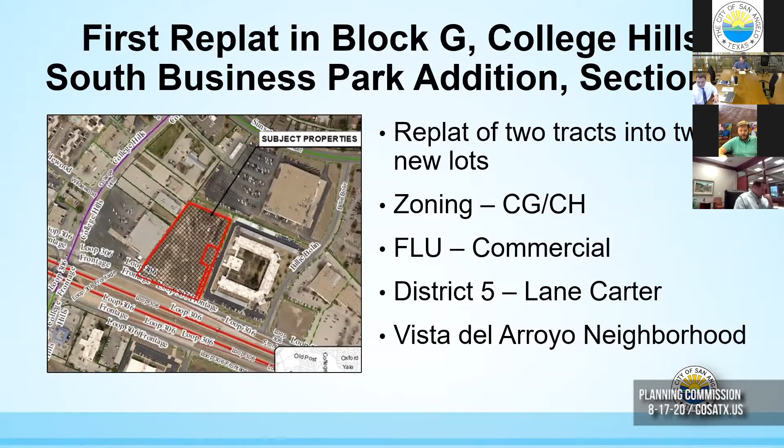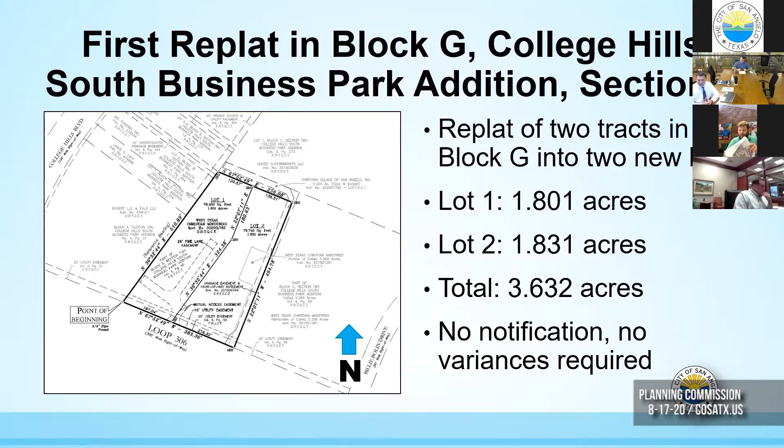So this will be replatted into 2 lots, future development for commercial. The zoning is CGCH. The future land use is commercial, and it's in District 5, Lane Carter, in the Vista Del Arroyo neighborhood. Lot 1 is going to be 1.801 acres and lot 2 will be 1.831 acres, total of 3.632 acres. This one's fairly straightforward. There's no notifications required. It's commercial, no variances required. It's just platting simply into 2 lots.

Staff believes that the plat conforms with the comprehensive plan. It's within a 1.5 mile commercial corridor on the north side of West Loop 306. There's an existing sidewalk that was built inside the property, and that will connect to a future TXDOT sidewalk, which should be built sometime in 2021 or after. So that sidewalk will need an easement. That'll be a condition of approval we'll get to in a minute.

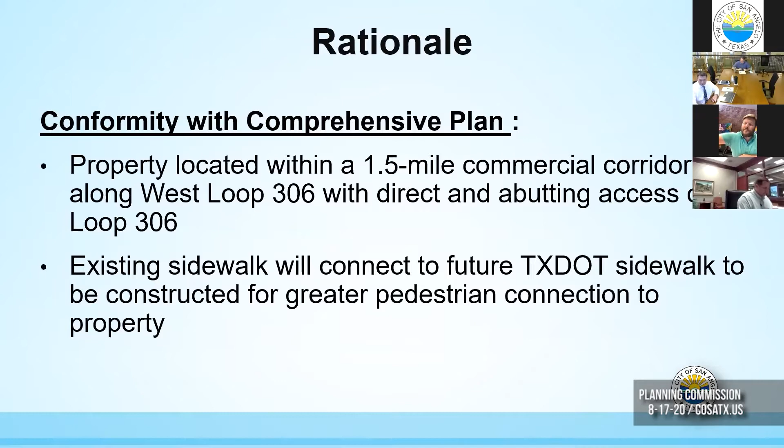Direct abutting access the lot has on Loop 306. There's the existing sidewalk, so that meets statement D in the Land Development and Subdivision Ordinance for safe vehicular and pedestrian circulation. There is a required water and sewer main that will be installed, so that'll satisfy statement G, and the efficient layout of lots will continue to have direct access on West Loop 306 with frontage. So that's just the logical order pattern of development, statement O.

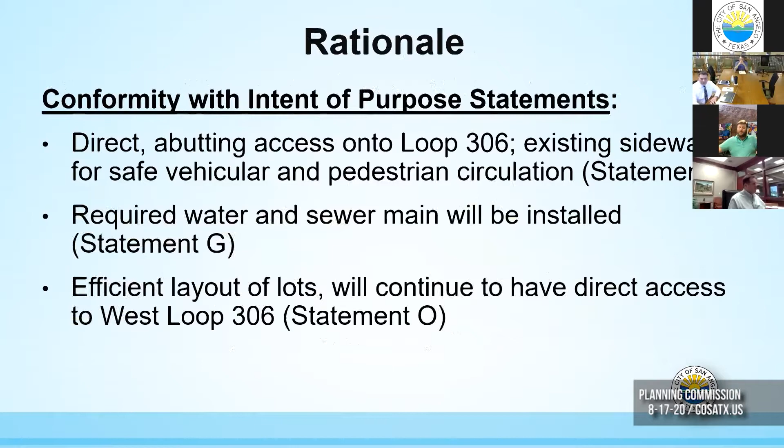Yeah. Staff, are you there? Oh, yes, go ahead. Yes, I'm sorry. You were cutting out on me.

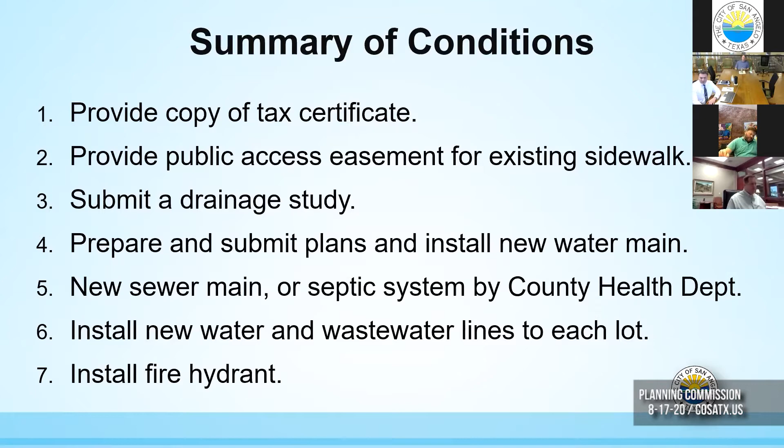Go ahead. Okay, so staff recommends approval of a first replat in Block G, College Hills South Business Park Addition, Section 2, subject to 7 conditions of approval: provide the tax certificate, provide a public access easement for that existing sidewalk, submit a drainage study, prepare and submit plans and install a new water main, a new sewer main or a septic system approved by the County Health Department (engineering can speak more on that if you need that), install a new water and wastewater lines to each lot, and install a fire hydrant.

So this concludes staff's presentation. Any questions or comments? Anyone have questions for the staff?

All right, I'm going to open it up for public comment. Jeff, please stop sharing your screen so we can see everybody. Pardon me.

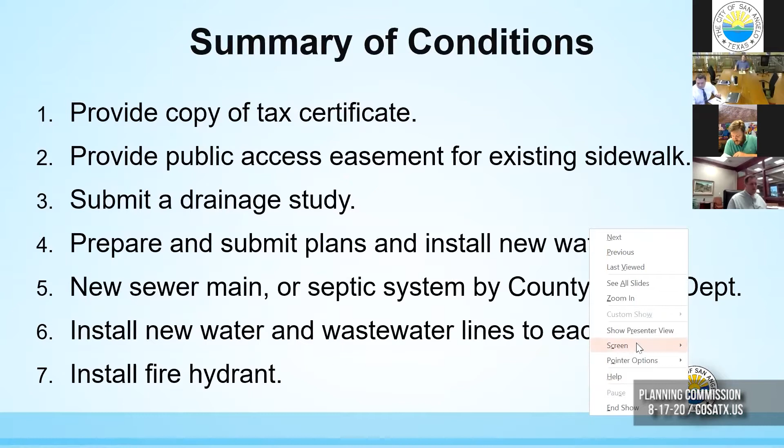Hi, this is Casey McBroom with Cross Engineering. I'm here representing the development and was just here to answer any questions.

Okay, anyone have questions for the applicant? Thank you, sir, appreciate it.

Do we have anyone else that wishes to speak on this case? If you would, please come forward. All right, I'm going to close public comment.

Anyone wish to make a motion or share their opinion? I'd like to make a motion to approve as presented. We have a motion and a second to approve as presented by the staff. All in favor, say aye by show of hand. Opposed? Six zero in favor. All right, 6-0.

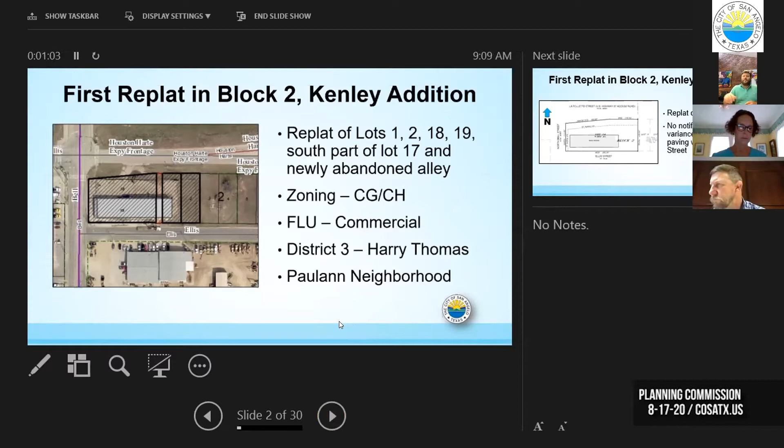There also, in going over this late Friday, even though North Bell Street has just been rebuilt by the city, it does not meet our standards within our thoroughfare plan and our subdivision ordinance. So we are handling from an administrative standpoint the variance on the existing North Bell Street.

The proposed plat conforms with the comprehensive plan. It is property located adjacent to East Houston Harte Expressway. It has direct and abutting access to 2 streets and then onto East Houston Harte. Again, it's part of that CGCH commercial along North Bell. And again, the City Council did approve the alley abandonment.

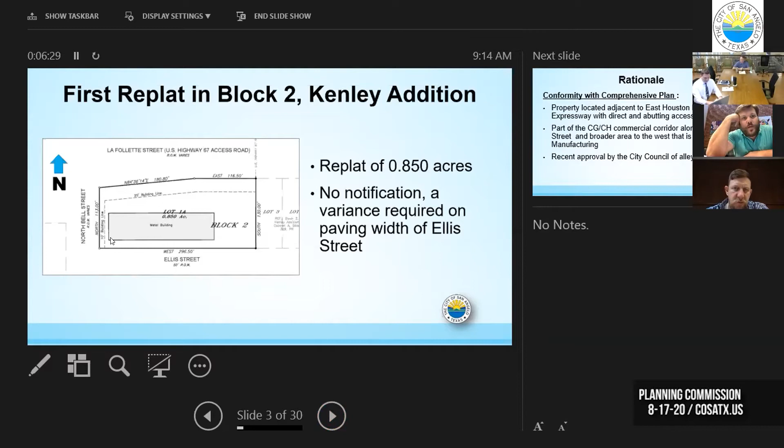What we would like is a condition that if that building was torn down and a new building was built, it would have to meet the required 25-foot setback from North Bell Street. It presently does not; it's just a little over 10 feet. Okay, and I think today we have to meet the ordinances. So even if this says 10 feet and somebody were to come in and build a new building, we would have to meet the 25.

The only reason staff was asking for it was just to clarify for any future developers that come in - they pull up the plat, they see 10 feet, thinking that's what it is, and we would have to tell them no. So it would just be for clarity. The building obviously is allowed to stand in its current condition today without any issues.

When were those improvements constructed? The improvements to the building or to the street? I'm sorry, when was the building structure constructed? Oh, it's been existing for 40 years or longer. Okay, perfect. All right, that's all I've got.

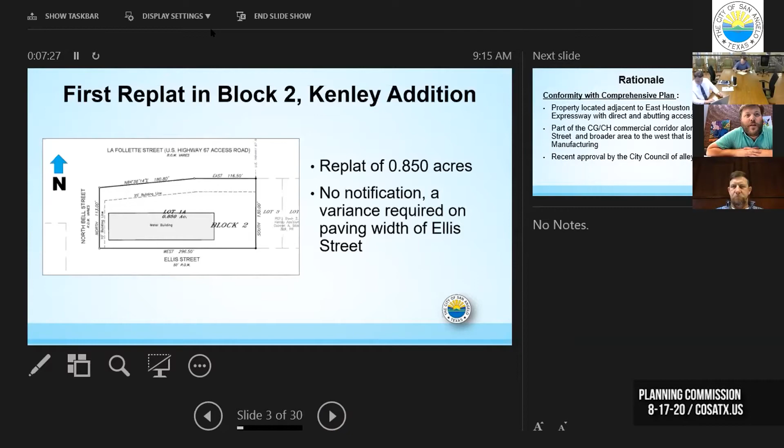Anyone else have questions for the staff? All right, I'm going to open it up for public comment. If you wish to speak on this case, please come forward.

Good morning, Russell with SKG Engineering. I would just ask that y'all would approve the variance on the street with improvements and approve the plat as presented, and be happy to answer any questions.

Thank you, Russell. Anyone have questions for Mr. Gully? All right, anyone else wish to speak on this case? I'm going to close public comment.

Anyone have thoughts or wish to make a motion? I'd like to make a motion to approve as presented, including the variance. Okay. Second.

All right, we have a motion and a second to approve as presented by the staff with the variance on the street, on Ellis Street. All in favor, say aye. By show of hands, aye. And opposed? That was 6-0 in favor. All right, 6-0.

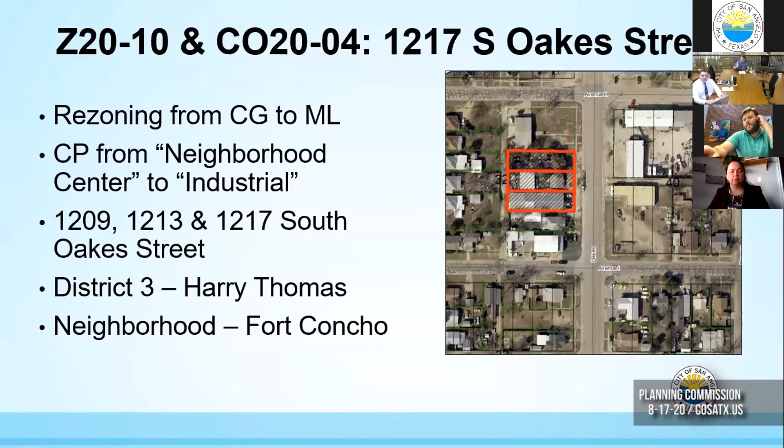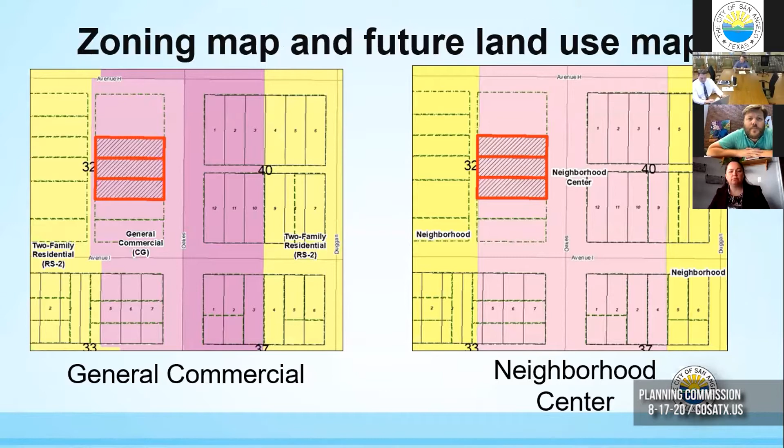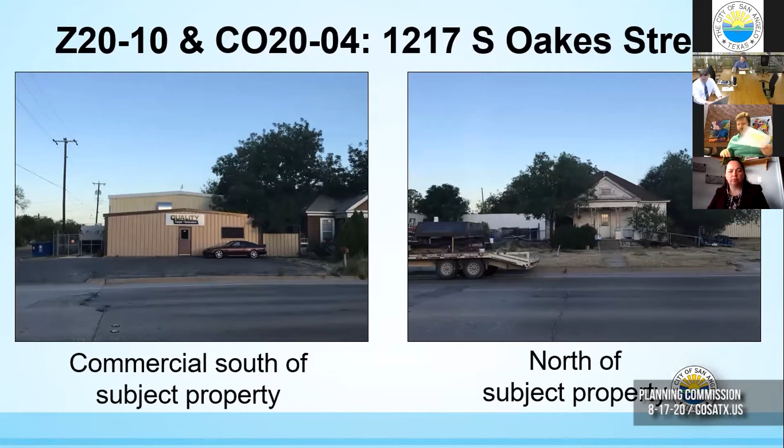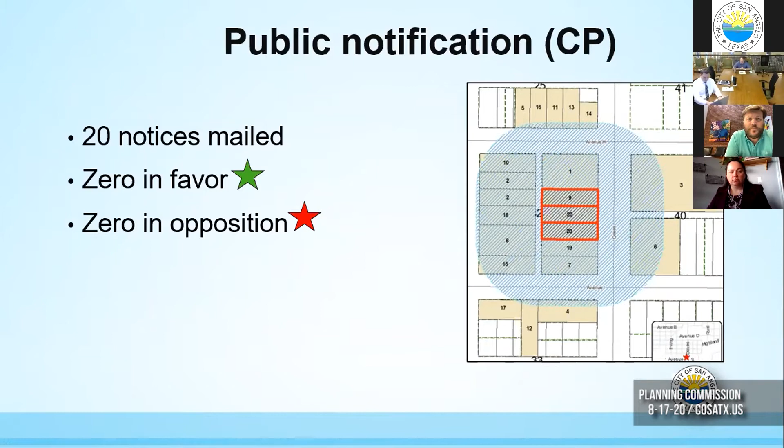And this one's directly across South Oaks from the subject property. I did mail out 20 notifications. I did not receive any in favor nor opposition.

A little background on this property. On the property at 1217 South Oaks, back in November 1977, there was a zone change from RS2 to CG with the conditional options for vehicle service, sales, and repair. Then in January 1986, there was a request for a zone change from CG general commercial to light manufacturing. However, this zone change, which is the exact zone change we're looking at today, was denied.

But at the same meeting, there was a special permit that was approved to allow manufacturing of awnings, subject to the condition that a privacy fence must be installed and there be no outside storage. With the approved special permit, the existing property at 1217 South Oaks is allowed, with the exception that currently that special permit is in violation due to their outdoor storage.

Now the property wants to expand its business onto the 2 adjoining lots directly north of the subject property. Those properties are 1209 and 1213 South Oaks.

A little rationale, the compatibility with plans and policies. The comp plan from neighborhood center to industrial would not be consistent with the surrounding development. However, take note, there is commercial uses in this area though. The subject property would be a better fit within neighborhood center due to the property being directly adjacent to a well-established home and residential area.

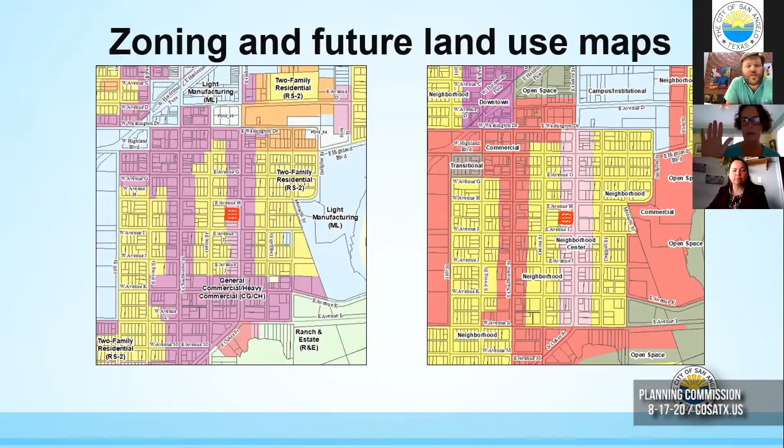Does anyone have other questions for the staff? I had one more question. In the presentation, Shelley, I think you said that there was no opposition from the 20 that you sent out. Is that correct? I did receive a couple of phone calls, it was just more kind of questioning what was going on, because I did place a sign on the property. Okay, thank you.

Got that? I was going to say, does anyone need me to translate that? Yes, I got that. And then the applicant is available, so okay, we're going to open it up for public comment.

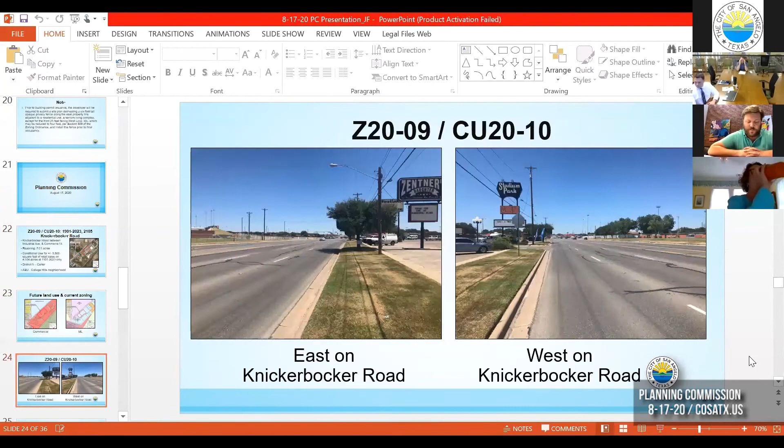Z20-09, 1901 to 2023 and 2105 Knickerbocker Road. Request for approval of a rezoning from light manufacturing zoning district to the general commercial zoning district located at 1901 to 2023 and 2105 Knickerbocker Road, being 7.01 acres on Knickerbocker Road between Industrial Avenue and Commerce Street.

All right, Hillary. Do you want me to read the other one as well? Please, yes sir. CU20-10, 1901 to 2023 Knickerbocker Road, excuse me. A request for approval of a conditional use to allow approximately 3,500 square feet of retail sales and service floor area within a building in a light manufacturing zoning district, located at 1901 to 2023 Knickerbocker Road, being 4.694 acres on Knickerbocker Road between Industrial Avenue and Commerce Street.

Good morning again, Jeff Fisher, Principal Planner. We're going to do these two cases as one since they pertain to portions of the same property. So this is a zone change, 2009, and a conditional use, 2010. The zoning is for both properties, so it's the plaza at 1901 to 2023 Knickerbocker, and then Stadium Lanes Bowling Alley, which is 2105 Knickerbocker Road. The conditional use is just for the shopping plaza, 1901 to 2023 Knickerbocker Road. So the rezoning, both properties are 7.01 acres, and the conditional use is only on the 4.694 acre property.

What triggered this is, some of you have been here for a while on the board. Bush's Chicken, Chick-fil-A, a number of other commercial businesses along the south end of Knickerbocker have done rezonings and conditional uses over the last 4 to 5 years.

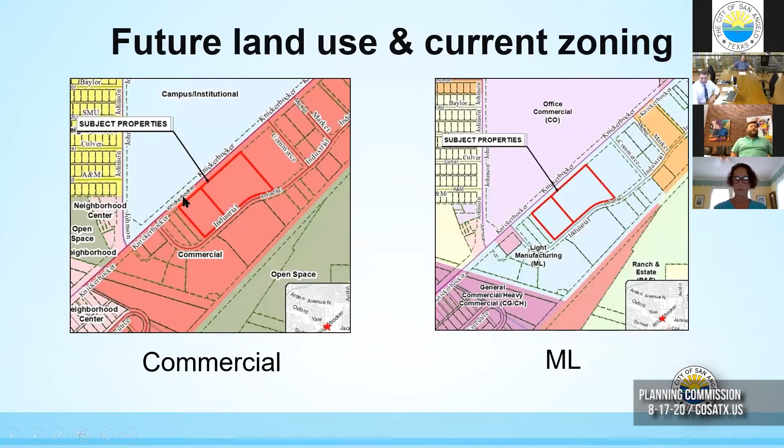Once that conditional use gets approved, the rezoning will continue on to City Council to rezone the whole properties to CG, allowing all retail uses in the future without having to do this each time. So let's start with the rezoning. It's in District 5, Lane Carter in the ASU College Hills area. The future land use is commercial, and the current zoning, as mentioned, is ML.

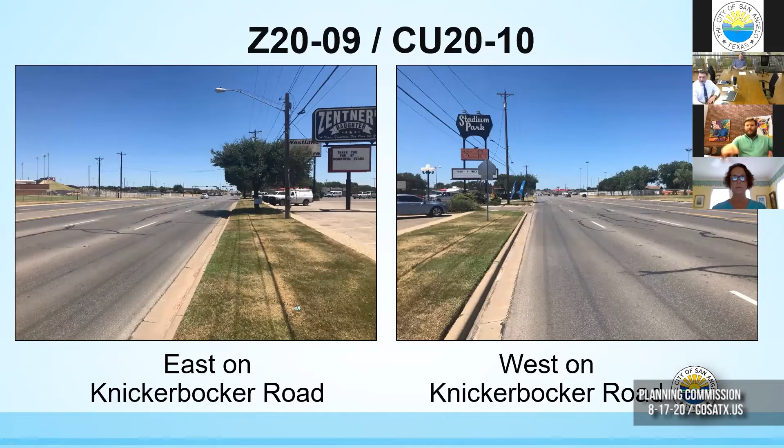This is looking east on Knickerbocker. There's the old Zentner's Daughter, and Stadium Lanes bowling alley to the west. This was all Zentner's Daughter. The east side, from your view west, will be the future restaurant, and then this will be the retail store. So it's the retail store that's triggering all of this today.

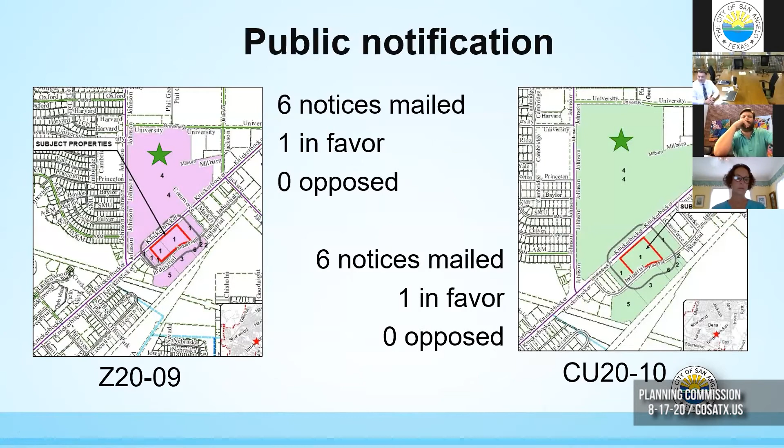This is Stadium Lanes, and this is looking north at the stadium. We received one response in favor from the school district, none opposed on both. So let's start with the zoning. Staff recommends approval of the rezoning.

It's compatible with the commercial future land use. This is about a 1.5 mile stretch along Knickerbocker Road, and all of these are predominantly commercial uses in these retail plazas. The lots will comply with the CG standards, there's more than enough parking, and you're surrounded by retail commercial uses and restaurants along this corridor. As mentioned, the ML zoning is no longer reflective of this area; it's really trended commercial, and the future land use is commercial, so it just makes sense.

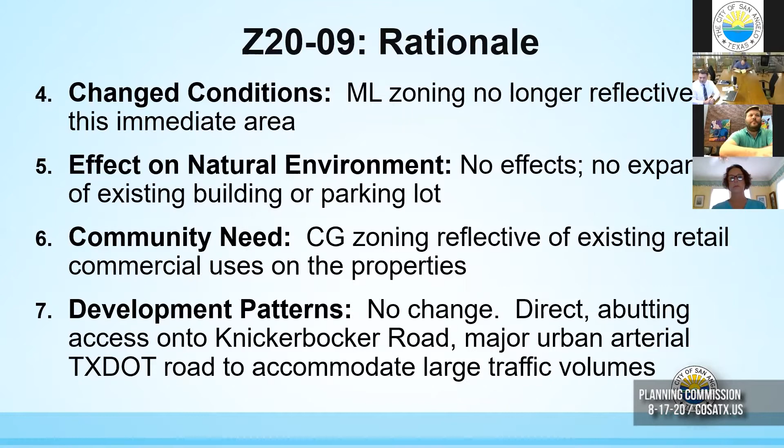There's no expansion of the existing building. The proposed uses will be located in the building, there's more than enough parking, and no change to the development patterns. TXDOT—there is no sidewalk there now, and there will be a sidewalk within the next year or two along there, so we believe it's just good pedestrian access, vehicular access, etc.

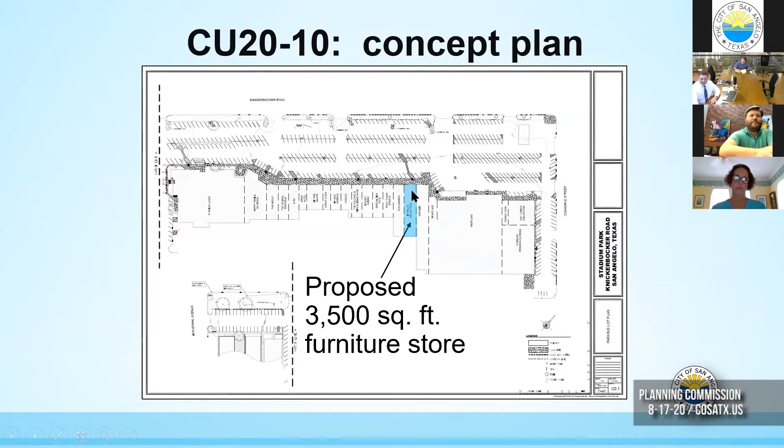Here's the 3,500 square foot area. There's the proposed business, so it's going to be located in that area in blue. And this was a floor plan given to us just for your viewing purposes only.

On the conditional use, a lot of the criteria is the same, so I'm just going to move through this fast. There's no impacts on the surrounding area. As mentioned, it's interior renovations only. The lots comply with the CG standards, there's adequate parking, you're surrounded by retail commercial uses, and no effects on the environment, community needs, or development patterns—exactly the same as the zoning, so we believe it meets all those criteria.

Staff recommends approval of a rezoning from the light manufacturing ML zoning district to the general commercial CG zoning district on both properties, and approval of a conditional use to allow approximately 3,500 square feet of retail sales and service floor area in the ML zoning district on 1901 to 2023 Knickerbocker Road, subject to 2 conditions of approval.

Number 1, this is for the conditional use: the applicant shall obtain a building permit for interior renovations and change of occupancy for the new furniture store, and they're going through that process now.

Number 2, the applicant shall submit a development plan to the planning director delineating a pedestrian connection between the existing building and the future TXDOT sidewalk to be constructed adjacent to Knickerbocker Road. As TXDOT puts in that sidewalk, we're asking for a concrete sidewalk to continue from the new one, perpendicular over the grass, to where the paved parking area is, then do a striped connection—you probably see this on a lot of new developments. That's our current site plan standard, and they can give that to us when they submit their development plan for this project.

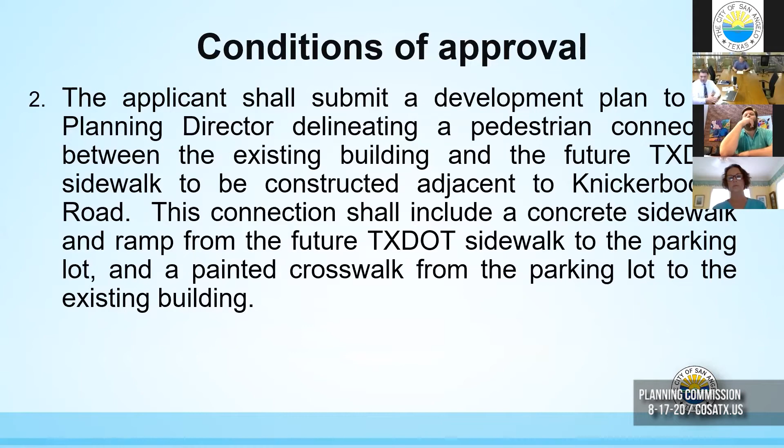This concludes staff's presentation. Any questions or comments? And I'm going to stop sharing my screen.

Jeff, does anyone have questions for the staff? I have a question for you, Jeff.

So they're wanting to do the conditional use because Planning Commission can go ahead right now and approve that, and they can move forward. Correct. The zoning would take another 4 to 6 weeks, so this will just allow them to move forward on that property. Okay, so when the zoning does take effect, what happens?

The conditional use will be what the zoning is. So does it just show up in perpetuity? Does it go away? Does it stay there? What happens with it?

Well, once they get the approval, since they're going through the permitting process, like special uses, they have 12 months to meet those conditions since there's a permit required. And so they'll end up fulfilling those conditions anyway through the permitting process. In a roundabout way, the conditional use will be approved and will still sit on the books, but they've already fulfilled those conditions.

And so the advantage of the rezoning is it'll allow not only that unit, but all the units in the property to have commercial uses without having to worry about this. One of our discussions has been potentially, in the rezoning ordinance, to possibly take away the conditional use so it doesn't just sit there underlying for clarity, but we have not made that decision yet. So possibly when the rezoning goes into effect, the conditional use could just go away.

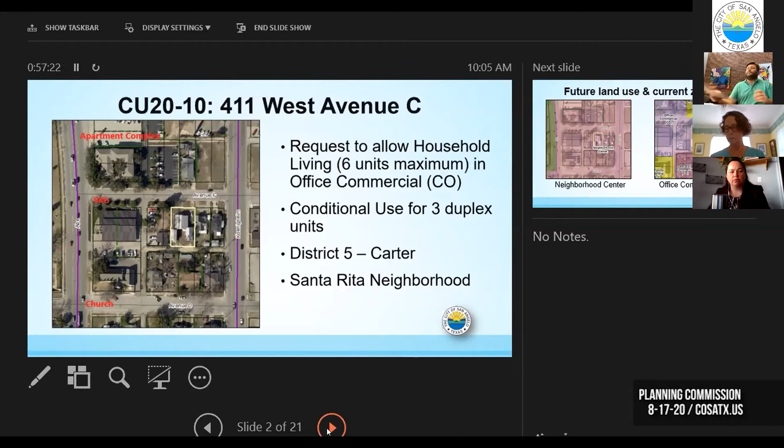This building burned, and they would like to replace what was originally a house and then was converted to a duplex.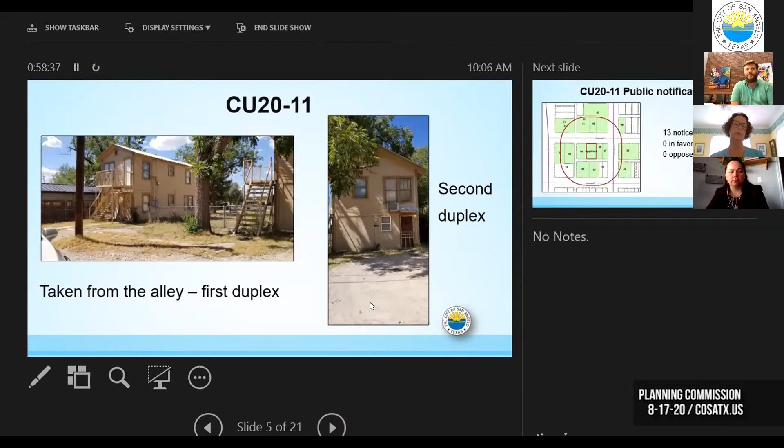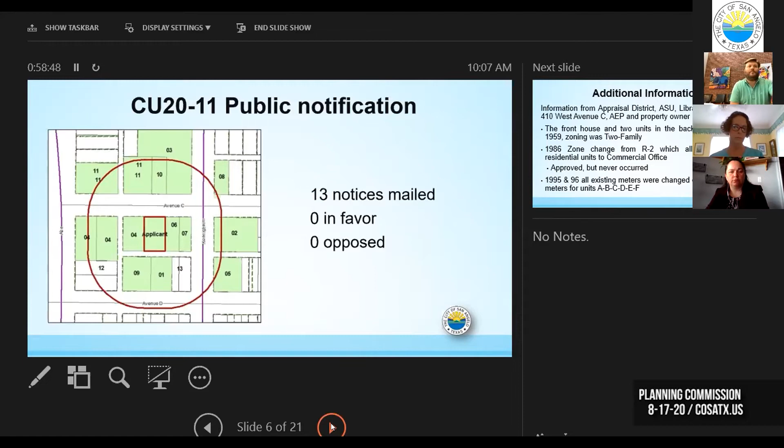This required notification. We sent out 13 notices. We did not receive anything in writing, either in favor or opposed.

A little additional information for you. Because of the age of this area, it's in the older area of San Angelo. It's in a transition area.

The applicant came in to talk to the city about replacing that front building as a duplex. It was a duplex, and they wanted to rebuild it as a duplex after the fire.

In trying to establish a timeline, we ran into some problems just because of the age of the area. We looked at the appraisal district information, ASU's information on student rentals, the library, a resident across the street who has been there for 57 years, AEP's records, and then the property owner, what they knew and were told when they bought the property about 15 years ago.

The front house and those 2 units in the back were all built according to the appraisal district in 1959. The zoning at that time was 2-family. It allowed the 3 individual duplex units. It met the total square footage on the lot, which is 9,000 square feet.

And it continued that way until 1986, when there was a request for a zone change from R2 to commercial office. The intent at that time was to develop a commercial office retail area. As I said, that was approved, but it never occurred. It just continued as it was. There's a time lag again in there.

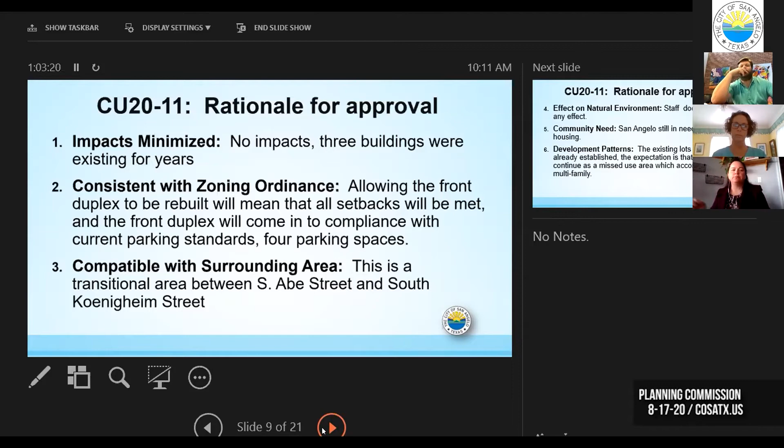Staff does not anticipate any effect on the natural environment. Community need has been established—San Angelo is in need of rental property for housing. And the development patterns will show no change; what existed before will simply exist again.

Staff is recommending approval of the conditional use to allow household living, 6 units maximum, in the office commercial zoning district, subject to 2 conditions: first, the applicant must obtain a building permit; second, development is limited to those 6 units. The new duplex must meet all current ordinance requirements, and any future remodeling of the remaining units will be subject to the ordinances in effect at that time.

Given that, are there any questions? I have a question for you, Sherry. So my question is, why would we not change the rezoning to a multifamily rezoning instead of a conditional use?

It's very simple—it's a time matter. The applicant wants to get started on rebuilding that duplex unit. This whole area is an income generating area for them. The rezoning takes longer. How long ago was the fire? I don't know exactly, the applicant is here. I think it was about 3 months ago, give or take.

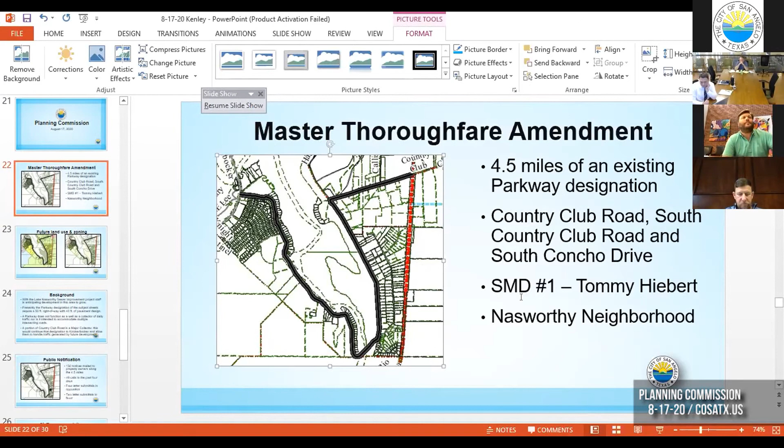With the Lake Nasworthy Sewer Improvement Project anticipated to get started in 5 to 7 years, we're expecting this area to develop into a lot of residential area and some small commercial area in minimum places. The present designation is a parkway designation, which is intended to carry traffic through an area to recreational or visually beautiful areas to look at nature, etc.

It's not conducive to the interchange of additional roads coming in. And that was our feeling that now was the time to change it to a major collector area, because we know there will be development occurring in a number of places.

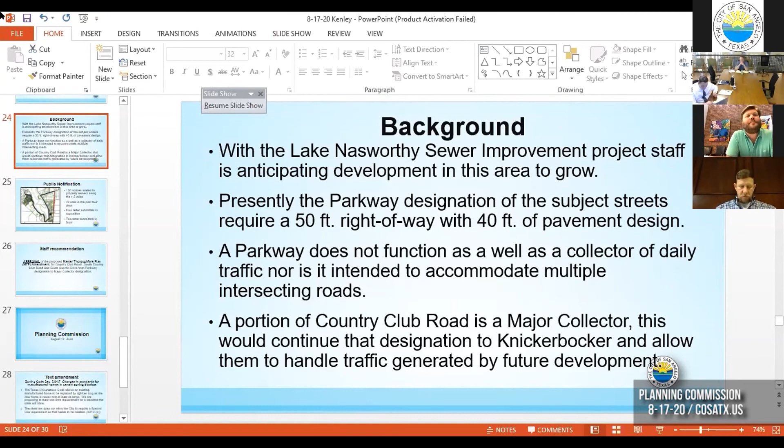We sent out notices to 130 property owners. I counted the other day, and I have talked to 49 people that have called and asked questions, and had a number of concerns. We've shared those with you, what we have received, and Lance has those also. There are a number of questions that the property owners have about how the street would develop, what will happen to their individual properties, how will traffic be handled, and maintenance on the street. Lance is more than gracious, has agreed to address that. So Lance, I've stopped sharing so that you can take over.

Hopefully, morning Planning Commission, Lance Overstreet, City Engineer. I'm hoping that you guys can see my screen here. Should say Planning Commission, August 17th.

One of the reasons that we were wanting to bring this to you guys is largely being driven by the sewer trunk main project that is going to be going on out at Lake Nasworthy. As you guys well know, currently we kind of have a moratorium on development out there in the lake area. One thing that we've been looking at is, okay, if that moratorium for development goes away, how is that going to impact things in the future? What kind of areas do we have some deficiencies? What areas should we be concerned about? And just looking at how that all stages in long-term plans.

One of the things that has come up on a couple of occasions is South Concho Drive. As you guys well know, we have the newer Lakeshore Estates that is expanded up on the north end of South Concho Drive near Knickerbocker. One thing that we looked at in terms of how this South Concho Drive is functioning, as well as what the current right-of-way is, it kind of makes it prime for the potential to be looked at for raising the classification up from it.

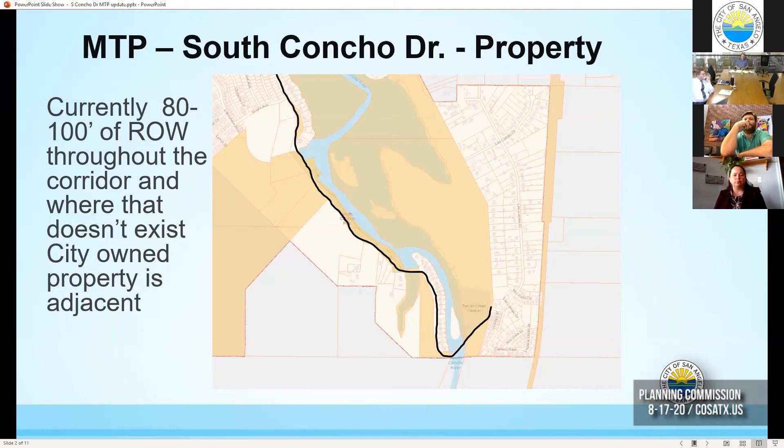Now, one thing that really has us concerned is this next slide, showing right down at the very end of South Concho Drive. You can see that we have over 5,100 acres of properties that are currently undeveloped. And if any one of those were to develop, the amount of traffic that is already congested along South Concho Drive is going to be increasing considerably.

Right now, if you guys have been out there on that roadway, you know that it is a parkway drive, a 2-lane road in somewhat of a rough condition. There are very narrow road crossings or bridge crossings, and there's a low water crossing. The other thing that's kind of driving this, from the engineering standpoint and the planning standpoint, is that as we look at how this road develops long term, we need to be able to put funds aside and prepare for the long term and the capital improvement of what this roadway is going to be.

A parkway just doesn't really have a very defined standard. So when we're looking at how do we long-term prepare for how this roadway functions, that also means how do we decide, from a capital improvement side, how wide this roadway needs to be, how wide those bridges need to be, and the low water crossing.

The other component is that there is a lot of pedestrian and bicycle traffic on South Concho Drive. Honestly, with the amount of traffic we have the potential for, a 40-foot pavement or a 50-foot right-of-way would probably not give us the adequate space to accommodate the traffic and to plan for pedestrian improvements.

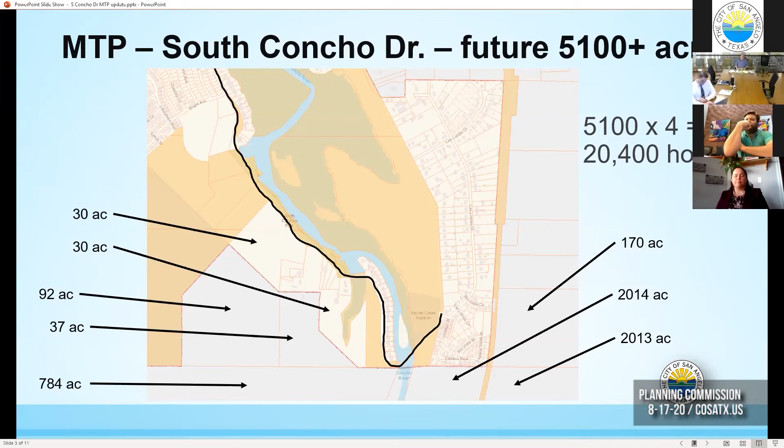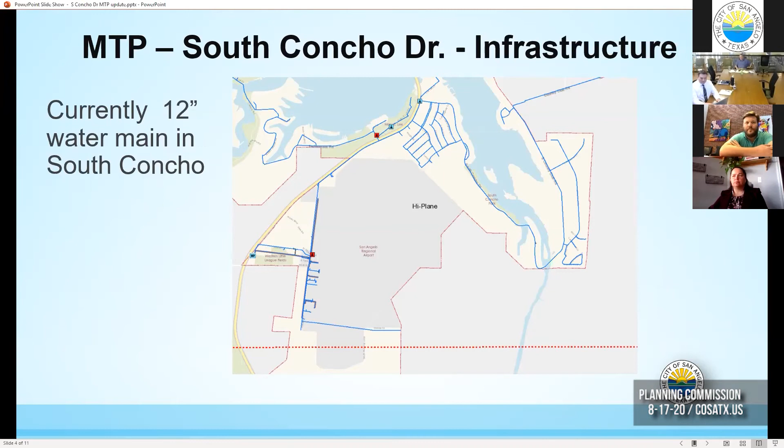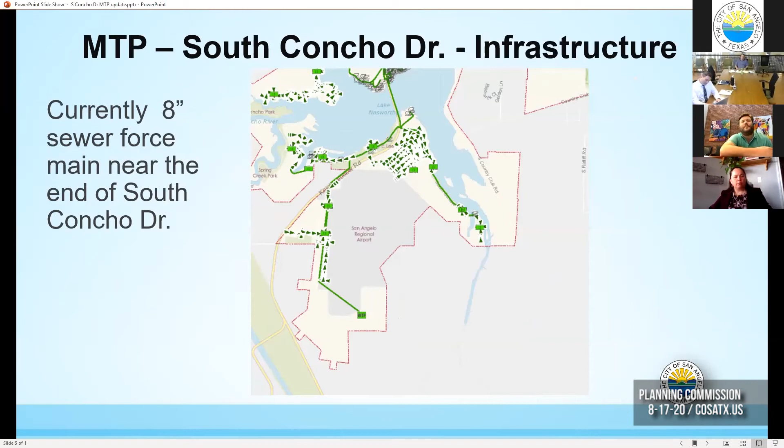You can also see the sewer main actually goes out to the very end of South Concho Drive. It does not make the corner into Las Lomas and South Country Club Road at this time, but it is right there and able to be connected into for all of those properties I highlighted earlier.

Additionally, we did some numbers and asked, okay, if one of these developments goes in, say a 2,000 acre development, are people going to want to go down South Concho Drive, or will it be faster to take South Country Club Road and come back around the other way? We ran the numbers going to that corner of Knickerbocker Road, right where the Jacks is, and you can see that if you take South Concho Drive, even with those speeds being lower, it is going to be considerably faster.

We also have the opportunity, and we're seeing a lot of movement towards Twin Mountain Drive, and the possibility of Twin Mountain Drive being extended all the way to 67. That would also direct people in that Las Lomas area and future possible developments to use Knickerbocker Road even more.

Now, I know a lot of residents had concerns about speeds, the condition of the road, things like that. I will tell you the city is not planning on jumping on this and making a development happen very soon. We are really trying to set ourselves up, in the long term, so that if need be, as development drives it, we have the ability to put in a roadway that would meet that demand.

It would continue to have slower speeds because we do have residential directly abutting it. You'll see in certain parts of town where we keep the speeds slower, where we have residents right up against it, and that's how it could develop long term.

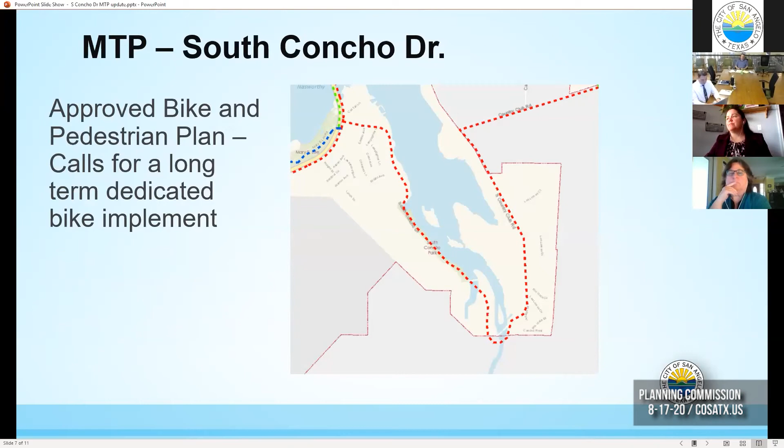Also, as you guys well know, there is an accepted pedestrian plan and approved bike plan that does show it on that drive as well. So it currently does not function with the current standard to be able to accommodate that in the long term either.

So there are several reasons why we're looking at this. One is we've already seen a lot of inquiries on different properties around the lake as this sewer trunk main gets closer to being constructed. South Concho Drive is already functioning as a collector. I don't know if you've gone down South Concho Drive yourselves during rush hour, at that 5 o'clock time or in the morning, but traffic is queued up and stacked pretty heavily.

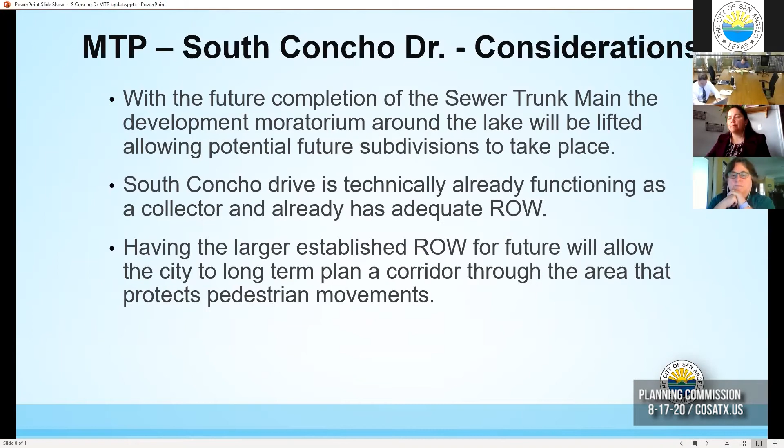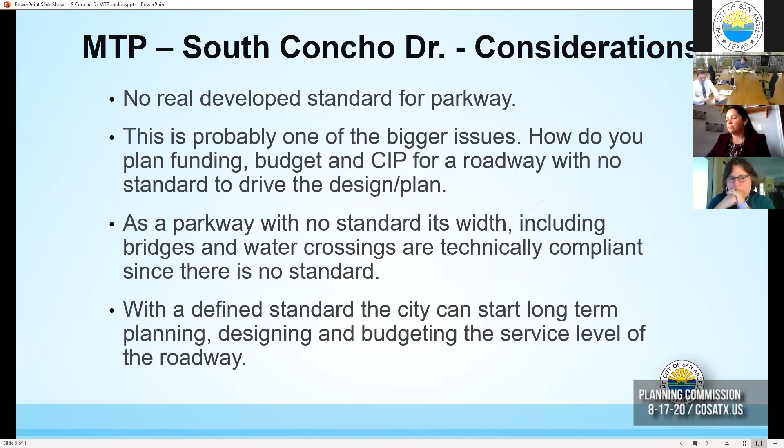Some of those turns are very sharp, and having the additional right-of-way would allow us to remedy that long term, especially if we see continued development that way. The other concern is just planning for this, being able to set the standard as to how it's going to be constructed, the width, and the budgeting of it is really helping to drive this as well.

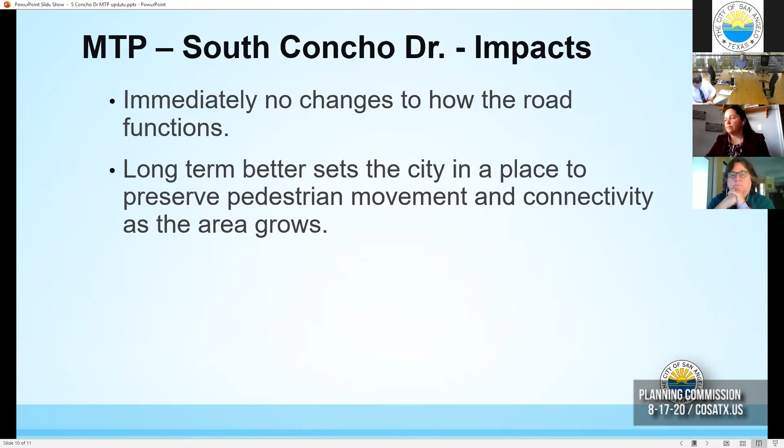Again, no changes immediately. It just sets the city up in a better position long-term to handle the planning and financing for the pedestrian and connectivity needs as that area continues to grow. So I'm sure you guys probably have a lot of questions.

I have one, Lance. Can you give me the eastern boundary of this dedication? It doesn't go all the way to 277, does it? I'm going to stop sharing my screen because I believe Sherry has that image of exactly how that looks.

But as Sherry is pulling that up, you are correct—a portion of Country Club Road that's already within the city limits is already a collector. So this would be from the existing collector, then around through the lake. So it's already been designated, a stretch of Country Club Road has already been designated as a collector. Yes, it's a major collector. This will just be a continuation of that.

Anyone else have questions for Lance or the staff? All right, I'm going to open this up for public comment. Sherry, if you will stop sharing your screen—I don't believe we have any public comment unless somebody responds.

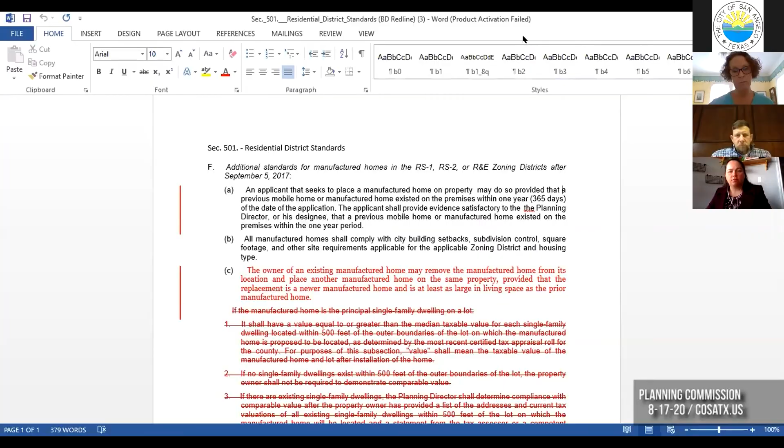Let's see if I can get this back up. My screen went to sleep on me. Hillary, I don't seem to have that. Can you pull it up? Just keep explaining and I will figure out the slide.

So what's required under state law is if someone lives in a mobile home from 1976 or earlier, they can replace it with a manufactured home without any action at all other than to come in and get a moving permit. That complies with both the federal and the state mandate. So what we are providing agrees with state law, doing away with a special permit, but requiring that within 1 year of having removed a manufactured home, they can replace it with one that is newer and as large or larger than what was there. After a year, they lose that ability.